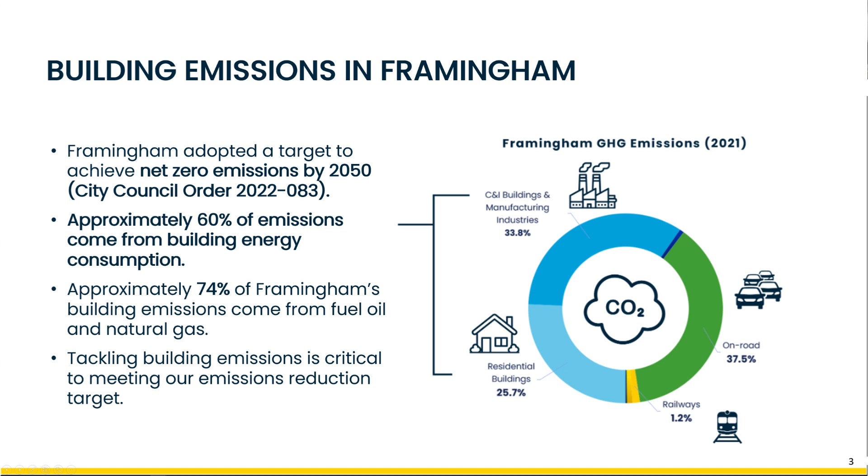So while we have to tackle that challenge, I think some important context is that building energy code can help ensure that we're moving in the right direction with our new construction, building towards a net zero future. Improvements in this area not only make our buildings more efficient and less costly to operate, but also healthier, with improved indoor air quality and enhanced resilience.

So tonight we'll be focusing on the Specialized Opt-in Energy Code, a new energy code option developed in 2022 as a result of the Massachusetts Decarbonization Roadmap Act. It's being explored for adoption in Framingham.

The Specialized Code builds upon the Stretch Energy Code, which was adopted in Framingham in 2014. The Specialized Code prioritizes deep energy efficiency, reduced heating loads, and efficient electrification for new construction. Since its development in 2022, it's been adopted by communities such as Natick, Ashland, Sherborn, Wayland, and Worcester. Dylan's going to go into some more detail about that as well.

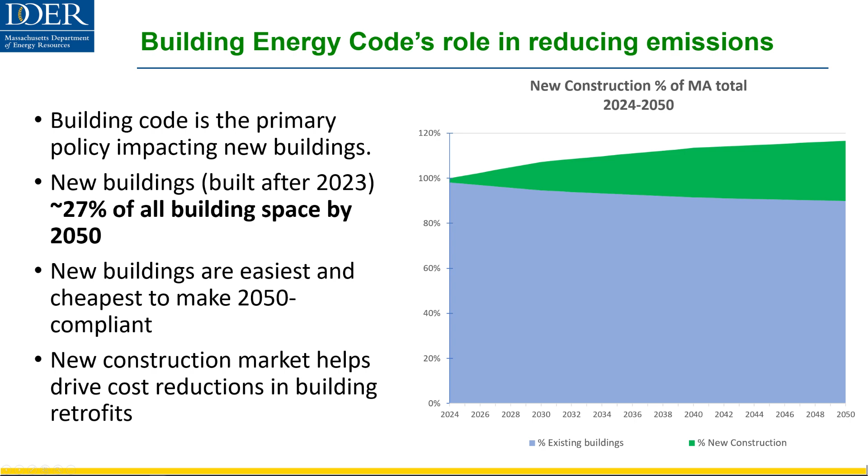With the specialized energy code and also the stretch energy code, we're really leveraging what's going on with the grid. Right now, the electricity sector within the state is fairly gas dominated, which means we have a fairly high emissions factor in this state. That means when you're heating by electricity, especially with most currently heating technology like electric resistance baseboards, it's actually very greenhouse gas intensive, even more so than heating directly with fossil fuel equipment.

However, especially in the past 5 years, past decade, there's been enormous growth and improvement in the models of heat pumps coming out, not just air source heat pumps but also ground source heat pumps. As you're all aware, with network geothermal that's going to be a lot more prominent in the coming decades. Despite the fact we have a pretty emissions-heavy grid right now, these heat pumps are able to heat and cool buildings with such great efficiency that right now they are less emissions intensive than just heating with gas.

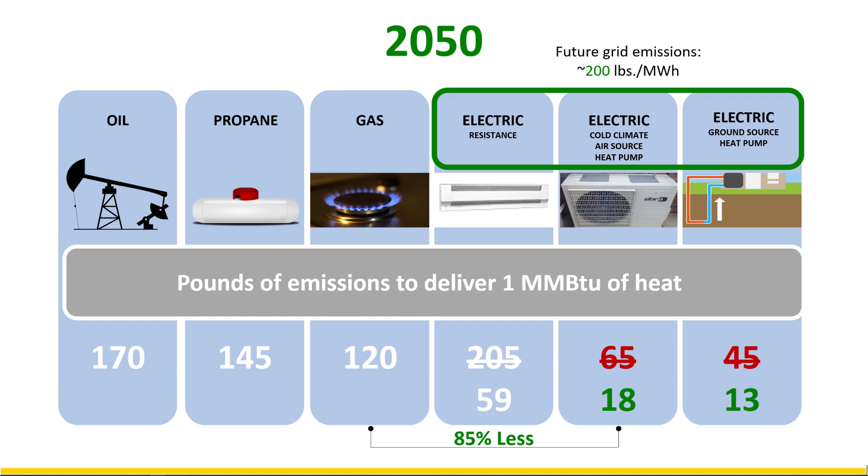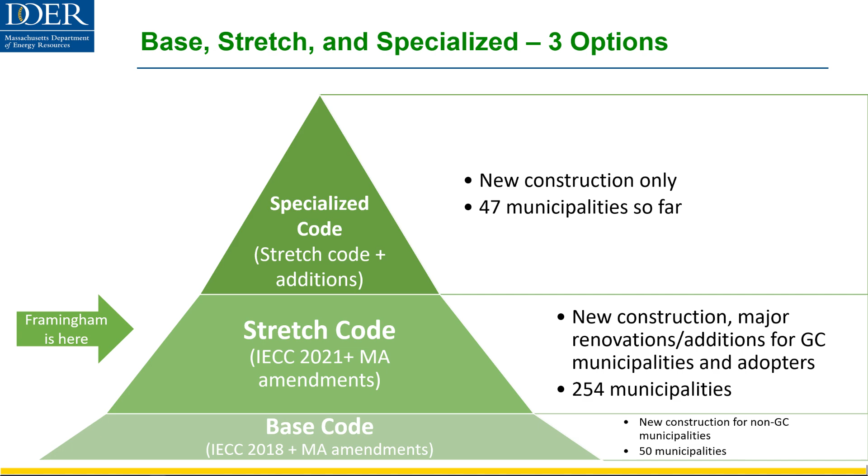So Sean kind of introduced this idea earlier, and I just want to contextualize what the specialized code is in relation to the other codes before Michael goes into a deeper dive. As you all know, Framingham has been a stretch code community for many years. It's one of 254 municipalities across the state, the vast majority of which are green communities. The specialized code exists at the top of this code pyramid, essentially as the stretch code plus an appendix plus some additions. So far we've had 47 adoptees to the code and counting. This code has only been available for adoption since January 2023, so in about 20 months we've already had 47 municipalities adopt the specialized code.

To provide a bit more detail on the policy, the specialized stretch code is one of the criteria of a new grant program that DOER and the Green Communities Division is launching. It's called Climate Leaders. This program will provide substantial grant funding for municipal renewable energy, outreach, as well as greater electrification and decarbonization technologies for municipal buildings. The specialized stretch code adoption is one of those criteria, and Framingham is on its way to meeting several others as well. Framingham is also well positioned to take advantage of the Climate Leaders Grant Program, considering it has already received more than $1.2 million in Green Communities funding, both in designated funding and competitive grants.

As Sean was alluding to earlier, a lot of Framingham's neighbors have also adopted the specialized stretch code. This includes Sherborn, Wayland, Natick. The town of Sudbury is considering it sometime next year. But as you'll see from the map, there is now a much greater geographic dispersal of the adoption of the specialized stretch code, both in Western Mass and the Cape and Islands. We're seeing municipalities of different urban densities and income levels also adopt the specialized stretch code. So this isn't really restricted to the Boston metro area—it's spreading far and wide across the state.

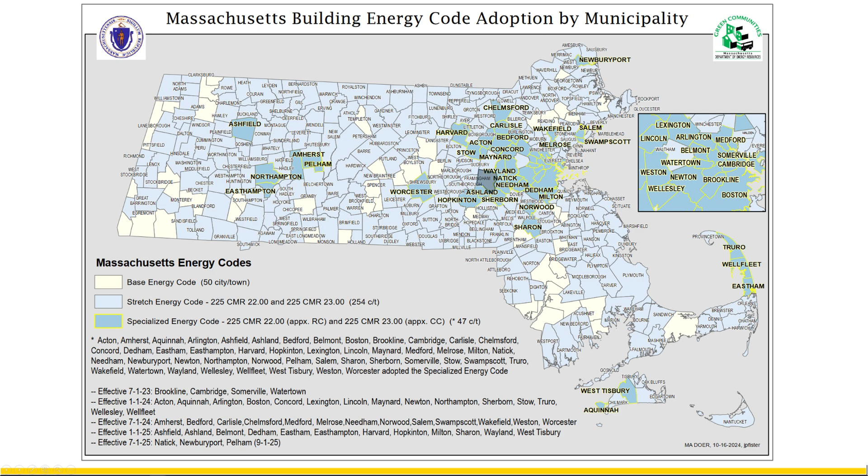So I'm going to turn it over to Michael Rossi for a bit of a deeper dive on the specialized energy code.

It's just the button, and you just got to press it hard. Great. Yeah, thanks so much, Dylan.

So my name is Michael Rossi. I'm an energy code specialist at Performance Systems Development, or PSD. We provide energy code training and technical support to code officials and others across Massachusetts on provisions of both the stretch code and the municipal opt-in specialized code. Before I start, I want to say I'll be referring to the code in a few different ways throughout the night—you might hear me call it the opt-in code or the specialized code, but these terms are interchangeable, both meaning the same thing. Essentially, it's a second level above the stretch code.

First I want to bring forth some fast facts about the code. Essentially, it only applies to new construction—there's no impact on the specialized code for existing buildings, so only new buildings will be impacted by the code requirements. There are also no additional requirements under the specialized code if you're building a new all-electric home; those are the same requirements as under the stretch code. So there's nothing new you'd have to do in that case.

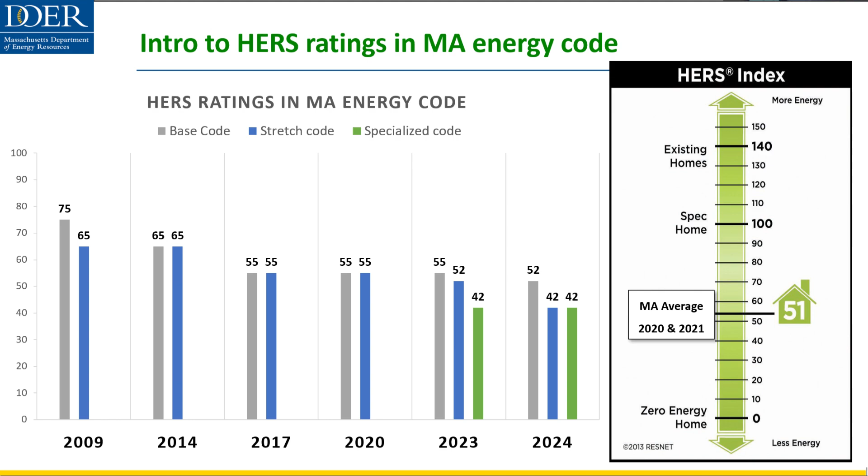The requirements for the HERS rating are equivalent to those found in the stretch code, so there aren't any differences to the HERS score between the stretch code and the specialized code. Now we're going to break down some of the specifics about what's different between the different code versions and talk about some of the specific provisions.

If it's an all-electric new home of any building of any size, the requirements are the same as they would be under the stretch code. It has to be either a HERS 45 or Passive House certification. There are two aspects of certification: the US model, called PHIUS, and the European model, PHI, or Passive House Institute. Essentially it's similar to HERS—also a third-party certification system—but I'll let the experts talk about that later on.

When you're building a new mixed fuel building under 4,000 square feet, the HERS requirement under the stretch code is a 42. But for the specialized code, there are two additional requirements: inclusion of a solar photovoltaic system with a minimum 4 kilowatt array, and wiring for future electrification. That means any equipment currently using fossil fuels for space heating, water heating, cooking, and clothes drying has to have an outlet nearby for future use of electric equipment if you replace it.

If you build a new home over 4,000 square feet—typically larger luxury homes—the mixed fuel pathway isn't actually available. The requirement is the zero energy pathway under the specialized code, which requires enough solar PV to get to a HERS 0 or PHIUS 0 certification, as well as that wiring requirement for electrification. Essentially it has to be a score prior to factoring in on-site power and then a score after factoring in on-site power—we'll talk more about what gets you there in a moment. It's really project specific; the size you'll need to get to zero really depends on the home you're building.

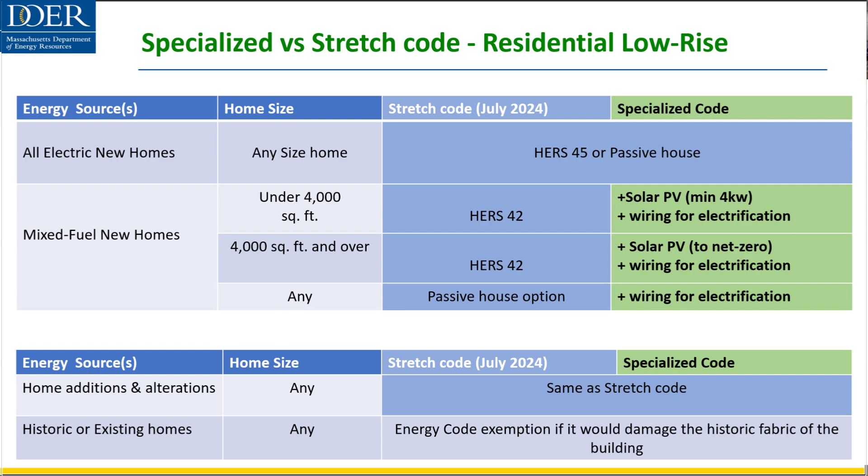So those are the main differences on the residential side. Here's a little bit more about the solar PV requirements. The mixed fuel pathway is required to have solar of about 300 square feet in size, oriented correctly—between 110 and 270 degrees of true north, where the system will be most effective. That's the outline of what the orientation of the home has to be in order to require solar.

Additionally, the code does not require trees to be cut down just to meet these requirements. The code describes it as shaded more than 70% of daylight hours annually. So if it's demonstrated that the site is shaded ahead of time, the solar requirements are not applicable.

As noted, if you're building a new all-electric home, solar is not required. If you're building passive house, solar is not required. If you're building a mixed fuel home under 4,000 square feet, you have to have at least a 4 kilowatt array. If it's over 4,000 square feet, those larger homes, you have to have enough to get to net zero, which is project dependent, but might look like 8 kilowatts or higher. For other residential buildings like 3-story low-rise multifamily buildings, the requirement is 0.75 watts per square foot, identical to the requirements found in the commercial portion of the code.

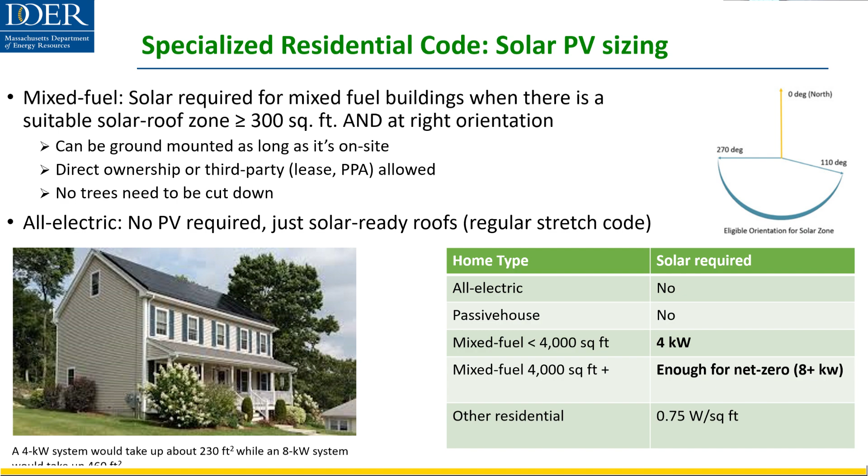There are a lot of really great incentives out there available to help meet some of the requirements here, to make some of the upgrades you're going to have to make to meet this code more feasible.

Mass Save incentives are subject to change, and they are in the process of developing a new 3-year plan, so we'll see what the incentives look like moving forward.

As of now, for single-family incentives, there's up to $15,000 for HERS if you achieve a HERS 45 or below, which is the same as what would be required under the code. For passive house, there's a $25,000 incentive. And there are adders for certain technology upgrades as well.

If you're using an induction stove for cooking or a heat pump water heater for water heating, there are potential adders to the amount of incentives available as part of this new structure. And those are just some of the incentives in Mass.

There are also some really great federal incentives available through the 45L tax credit, such as $2,500 if the home's built to Energy Star, as well as $5,000 if it's a DOE zero net energy ready home and meets that program's requirements. Additionally, there are some incentives available for solar as well, including a 30% federal tax credit extended through 2032.

As well as a 15% state level tax credit that's capped at $1,000. There are also some incentives available through both net metering and SMART programs.

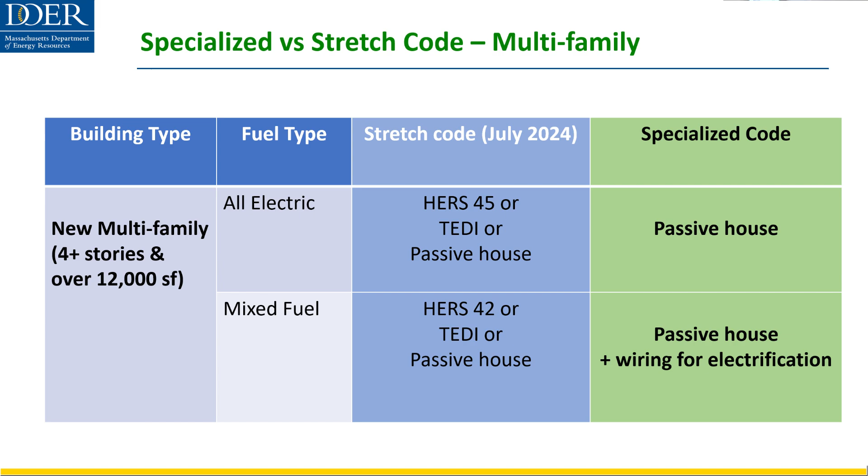My last slide before I turn it over to Hank is just similar information to what I just said, described in a different way. For all electric buildings, the requirement and pathway available under the code is passive house. For mixed fuel buildings, it's passive house plus that electrification ready requirement we just talked about. What passive house means, I'm sure Hank will get to in just a moment. So thank you all.

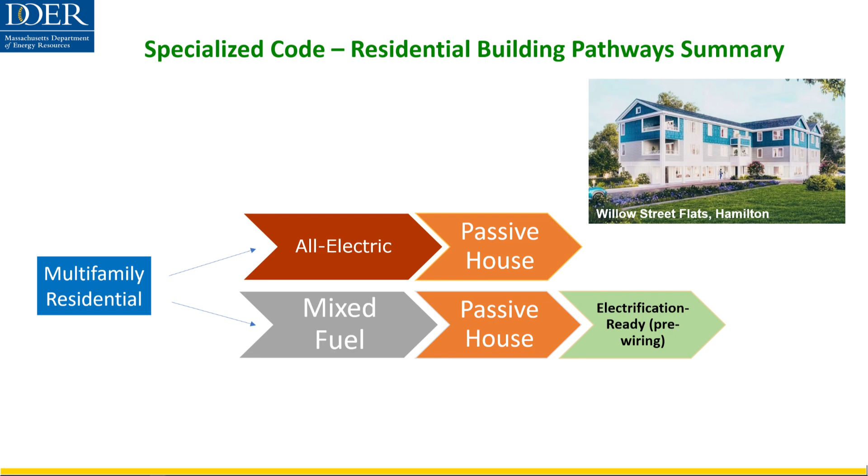I'm the president of Passive House Massachusetts. I've been in this role for close to 10 years after I retired as an affordable housing developer, and I've devoted those 10 years to advocacy for Passive House in codes and incentives and developing training programs. I'm going to go through my slides quickly and be available to answer questions. Stretch code is what you're working with now.

So what is a passive house? Passive House is a third-party building verification program with two options for certification: the Passive House Institute US, and PHI, the Passive House Institute International, which is European-based. The certification standards set energy performance and building envelope airtightness requirements, minimums that have to be met through a computer modeling program.

So how do passive house buildings perform? When you meet the metrics of these two systems, heating loads can be reduced by up to 90% or more compared to a typical code building, and overall energy demand can be reduced by 60% or more. These are remarkably energy efficient buildings. It's a quantum leap over code.

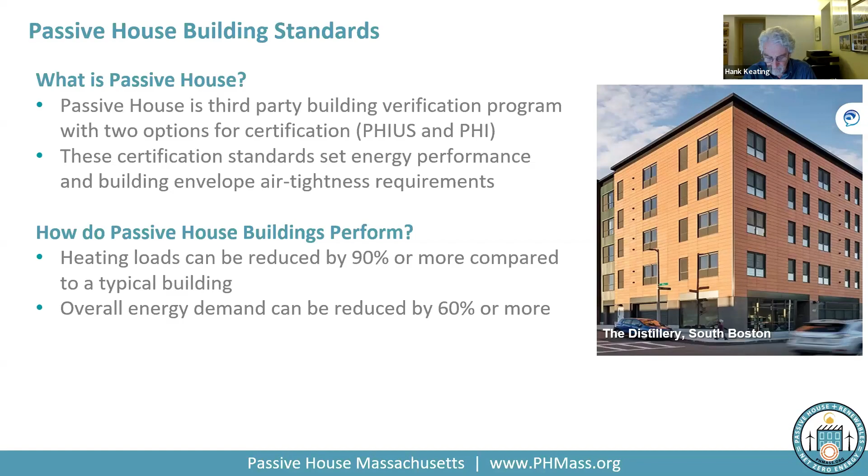Any type of building can meet the passive house building standards. I raise this because the term 'house' is in the name, so most people think it's only for housing. It's not—that's just where we've seen the major pickup of the technology in this state. But you can see here a school in Beverly, a single family home in Cambridge, and this is the largest passive house office building in the world, which recently achieved certification in downtown Boston. So it's any type of building.

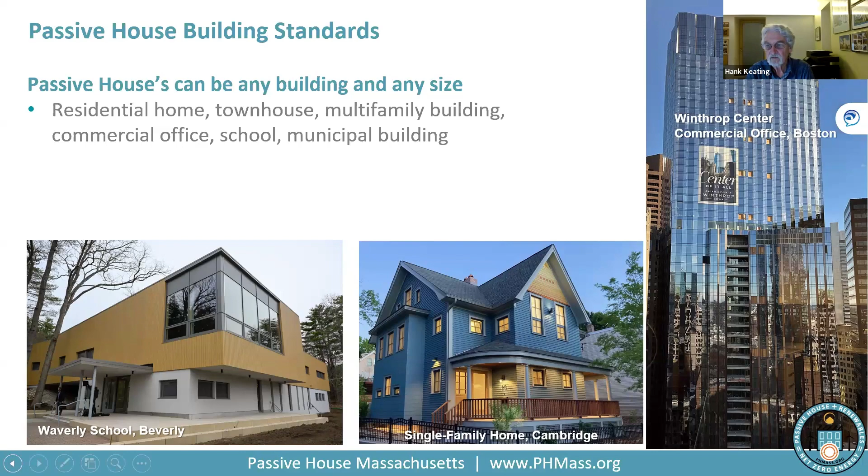I'm not going to go through this in great detail, but the features of passive house buildings are building science based. It starts with the building envelope, and the requirements are continuous thermal insulation, an airtight building envelope, thermal bridge mitigation, high performance windows and doors that reduce radiant cooling for resident comfort, and optimized solar heat gain, which is important for smaller buildings like single family homes. It's surprising how little significance that has on large multifamily buildings.

Mechanical systems typically have balanced and continuous ventilation with heat recovery, and the reduced load on the building allows for efficient and minimized heating and cooling systems. We like to say that if we put the money into cheap products like insulation, we can reduce the amount of money we have to put into the systems by downsizing them. And then there's efficient water heating and distribution.

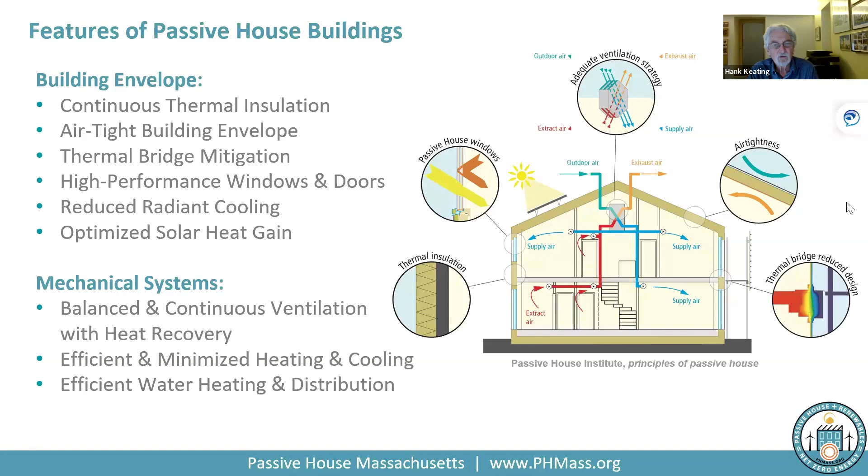Passive house buildings have many benefits from the building envelope. The financial benefits are predictable, stable, and reduced energy costs. We determine through modeling that the building meets that standard, and it's going to have dramatically reduced energy costs. That results in smaller and more efficient equipment, and in the end you've produced a higher quality, more valuable asset—a building with better durability in its envelope, one that's not going to require retrofitting 10 years from now as the state codes tighten up further.

Health and comfort benefits are sometimes overlooked, but it's obvious: we have improved indoor air quality with 24/7 balanced ventilation to all the spaces in the unit, reduced air drafts and consistent temperatures, and quieter acoustics—they're remarkably quiet buildings. Also important is the ability to shelter in place during a power outage, much extended. The environmental benefits include reduced carbon emissions, climate resilient buildings that won't require retrofits, and Passive House is the perfect platform for full electrification and net zero buildings. If you're going to aim for electrification and net zero, you should start with the most energy efficient shell you can, and that's Passive House.

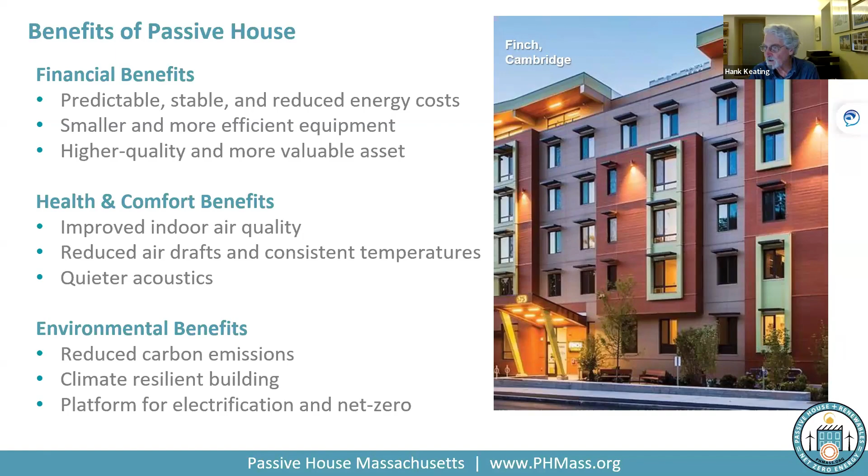So how do you design a Passive House? The architects and engineers must work with a certified Passive House consultant to design the low energy project. During that initial process, the consultant helps the team develop the approach to the building, and the early designs are submitted to the certifying agency, whether it's PHI or PHIUS, and go through early review to make sure they're on track for certification.

Then contractors are supported by Passive House raters and verifiers who inspect, test, and verify during field construction. So overall, the building owner follows a two-step certification process—one before construction, with all the submissions to the certifying agencies, and then after construction, showing the modeling and design submissions and all the inspection reports. QA/QC is an incredibly important aspect of Passive House to make sure we get these buildings built properly.

Even before this opt-in specialized code was adopted by 47 communities, which just happened this year, the existing incentive programs through MassSave had produced a registration list of over 15,000 multifamily housing units across the state. You can look at this slide and see that back in 2021, we had under 100 units of Passive House in Massachusetts. This is projecting construction completion of the units that have opted into the MassSave program.

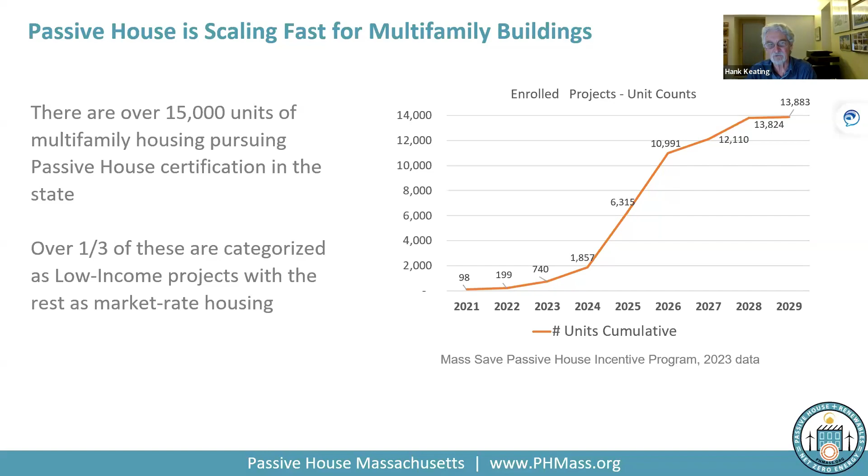Before that program was even designed, before the specifics of the incentive program existed, Passive House Massachusetts got together with the Mass Clean Energy Center and worked on the Passive House Design Challenge, because the biggest question was what does it cost to do multifamily Passive House. The challenge was to demonstrate you could do it for under 4%.

These are the six projects that competed and were granted money to take on the challenge, and you can see it was a major success. Most of them are under 2%. We have one at 3.5 and one at 4.1 that didn't quite make it. The important thing to focus on is that these buildings were designed seven years ago and built five years ago. The education of the design and construction community in the intervening years has been tremendous, and we can essentially guarantee that these projects, with the right building team and the right training, can do multifamily projects for less than 3%.

Next slide, please. And we'll go to, yeah.

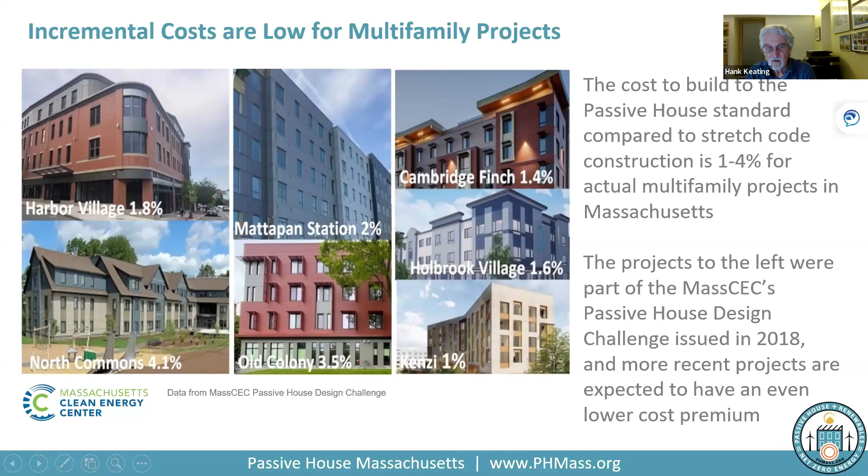So I often hear people say, isn't this going to be very hard and expensive for affordable housing? The fact is affordable housing has been leading the way, because DHCD—which is now EOHLC, a very awkward acronym—gives extra consideration to Passive House projects through their funding program, the qualified allocation plan. They award bonus points. All low-income housing tax credit funding is so competitive that it's almost compulsory for a project to go after those bonus points. We're at a point where over half of them in every funding round propose that, and the other half have other built-in priorities they can use instead of Passive House. So if you don't have a specific way to get funded, you need to go after Passive House for a low-income housing project.

So this is the multifamily project incentive program. Michael went through this, but I'll go through it in more detail because I think they did a great job designing it. A project team can get $5,000 up front for registering—so when we say we have 15,000 registered, that's not necessarily the number that will follow through. They get $5,000 for a feasibility study, and at that point they can decide whether to move on. The next step is energy modeling, for which they can get up to $20,000 maximum. If that energy modeling shows they can achieve pre-certification, they get another $500 per unit. Then, upon final certification after completion of construction, they get the final $2,500. So there's well over $3,000 worth of incentive available per unit for multifamily housing.

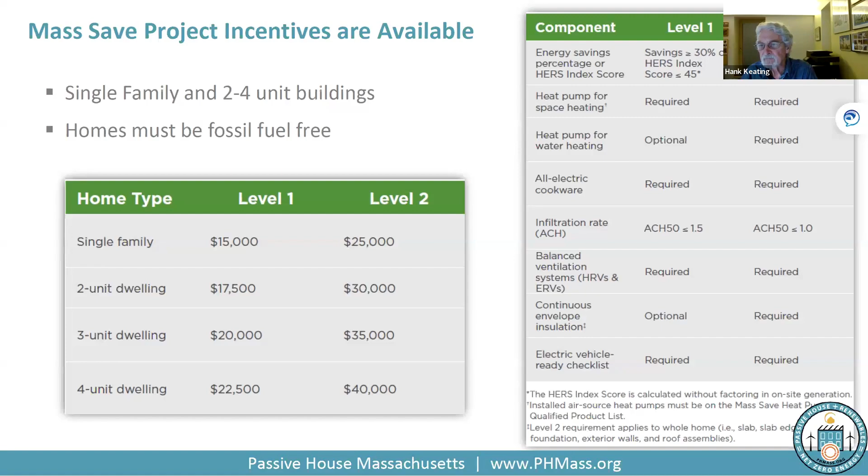So with all of the projects moving forward with passive house, it's critical that we have passive house training. Mass Save, when they put in the passive house incentive program, contracted with Passive House Mass to do passive house trainings. We've done thousands of hours of training over the last 5 years, including no-cost lunch and learns, workshops, and 50% reimbursement available for professional certification.

If somebody wants to become a certified passive house consultant, they can take the course and get a 50% reimbursement through the program. There are many other agencies and organizations providing training, including Studio for Performance Design and Construction. Nick is here and he'll be speaking after me. Beyond that, we've got NESEA, BE+, BSA, the Northeast HERS Alliance, and the Builders and Remodelers Association, all helping to take part in the training needed.

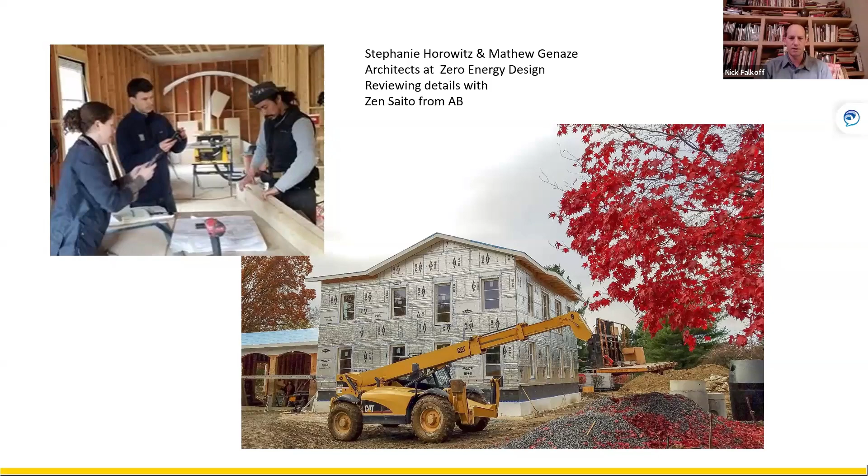So that house we showed earlier is the finished house in Newton. That's actually a net zero house with transportation, meaning the building generates enough electricity to power both the house and their electric vehicles. So that house will never have a gas bill, an electric bill, and they probably won't have to pay for any fuel for their vehicles.

So when builders talk about costs, I encourage people to think: yes, it costs the builder more upfront, but the savings passed on to that homeowner over 10, 20, or 30 years, with no utility bill and no transportation bill, can really add up. I think we have to redefine how we talk about cost in terms of upfront investment versus cost to the consumer. Next slide, please.

We found out about high performance building through the Builders and Remodelers Association of Boston, where I've been a member for about 20 years and got my license. A former president of that organization recommended I join a Builder 20 club, saying it was the best thing he ever did for his company. Through that, I reached out to NAHB and joined a Builder 20 club, a peer review group that partners you with builders from around the country to visit each other and learn. I was visiting with a builder, and one of the other builders was building Passive House in Iowa.

And I thought, this is kind of cool, I'd like to get into this. And I was emailing with the project manager, and we said, let's look into this. So we reached out to the PHIUS trainers course, and one of our PMs went down and took the course. So our introduction really was through the Builder Association, through some other builders practicing this in the Midwest.

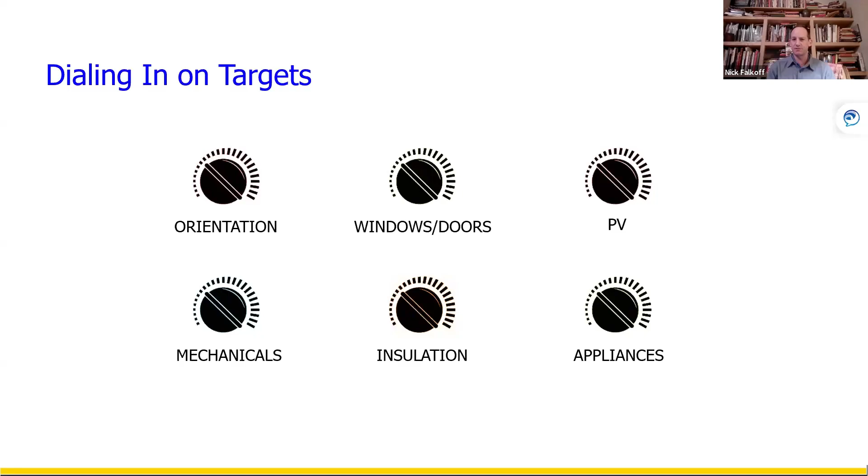If we go to the next slide, this is an example of one of the assemblies. This is a passive house we built where, once the design is getting ready to go to permitting, you want to know what your dials are. Now, this is a passive house, not a HERS 42 model. It's just a case study of what you can get into.

Every job is different. You might have really good southern orientation, or a lot of glazing facing the wrong way because you're trying to get a certain view, and so you might have to dial up another assembly to meet your HERS number. This house has very thick walls, an R44 wall. It has a thick roof, an R60 roof, and high performance triple glazed windows. Every assembly, every house, is going to be different.

What I tell people now is to really contact that HERS rater very early in your design. As soon as you can get your HERS rater on your team, do that. If your architect doesn't have a good HERS rater, reach out to any HERS rater and they'll connect you with one. Take the next slide, please.

On this house, that assembly I showed you, we're doing a 2x6 wall, and we use a lot of reclaimed foam on our jobs. So it's 2 layers of reclaimed foam with a layer of zip on the outside. When we're dialing in high performance, we're always looking at what is the cost, what is the performance, and then what is the embodied carbon. That's how we look at it.

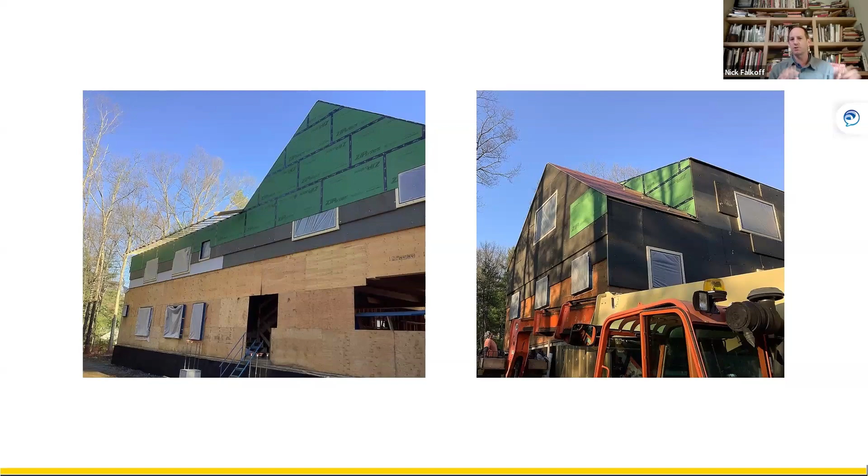So every builder is going to have to find that sweet spot between cost and performance. But that's where you really got to get that HERS rater on board early to know which way you're turning those dials. Next slide, please.

That's a passive house we built out in Weston. That's kind of what it looks like after that foam is added on. We're trying to find assemblies that are really familiar to what carpenters already do, and then just adding layers that they can understand—it doesn't have to get super complicated with how you achieve this.

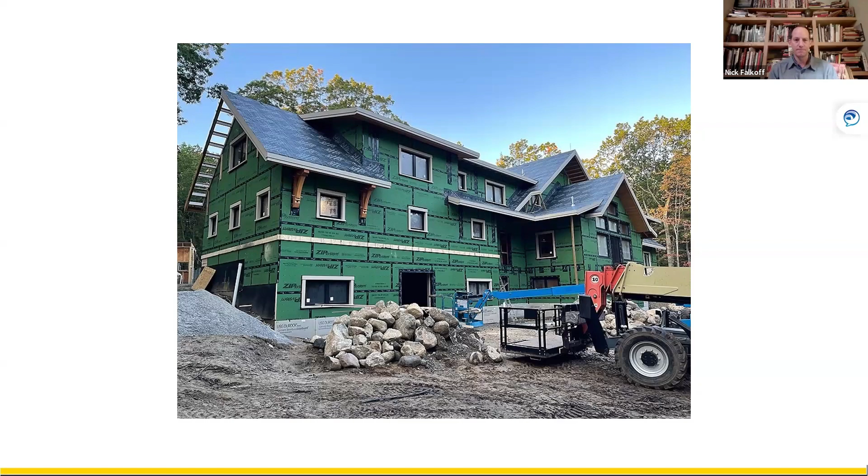Keep your value engineering options open, so don't design your team into a corner, right? If you don't think about orientation and then you start trying to dial up, you might have to go to a really thick roof or a really high performance window because you didn't get your orientation or your glazing right.

Then focus on high efficiency cooling systems. If you're not familiar with those systems, they're becoming more and more common—more and more HVAC contractors know how to use these heat pump systems. If you look at your orientation, your windows and your mechanicals early, those are going to have the biggest impact on your HERS score. Then if you get those things right, you can play with your assemblies and figure out which assembly works best for your trade contractors.

Once you figure out your formula, what Bob Riley shows with the Habitat is once they get their formula, they repeat it and just crank that out. At Auburn Hills, we've got a few formulas now our crews like. You have to find that assembly that your crew likes, and then you can repeat it. Like Hank showed in the multifamily, your first time through might cost you a little more, and then as you work through it, you get more efficient.

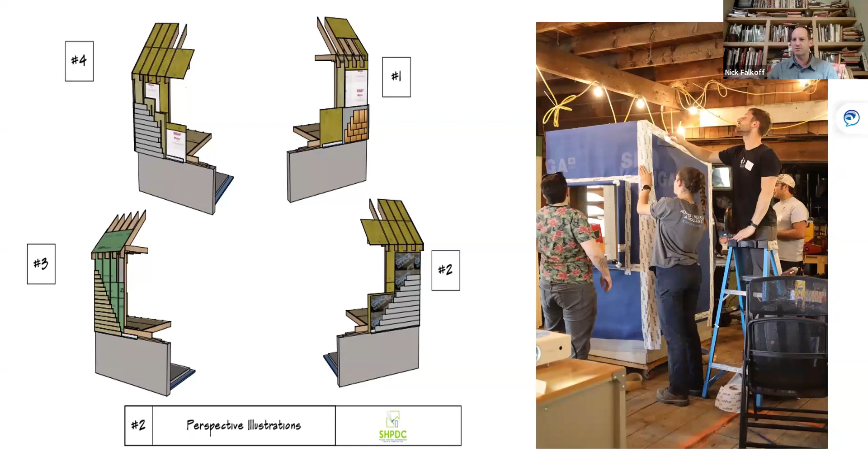Hopefully we'll be creating more hands-on courses and training facilitators through the Builders Association and other vocational school instructors to run these classes around the state. That's our goal. I think that's it for my slide, Sean.

Just a summary, same thing Hank said — what are the benefits? It's lower operating costs for the homeowners and renters. A net zero all-electric house means they have no gas or electric bill for the life of the building. A net positive building makes more electricity than it uses, and that can power your vehicles. Better indoor air quality, better thermal comfort, and better resale value on the marketplace. This is a better asset, and it's increasingly becoming valued on the marketplace as consumers become more aware of these units.

So when people talk about cost, yes, it can cost more to build it, but you can sell it for more, and it can hold its value longer.

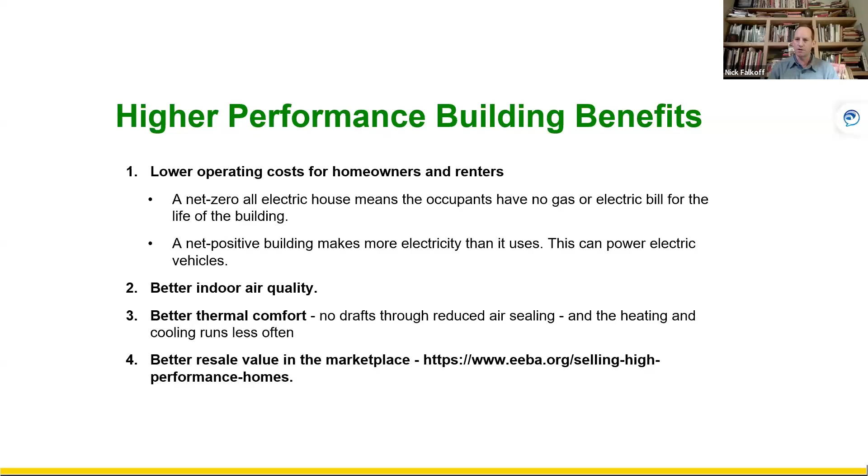So I think when I hear people saying it's going to cost more, yes, but let's broaden the discussion to 10 years out, 20 years out — what is that going to look like? That's all I've got for my slides.

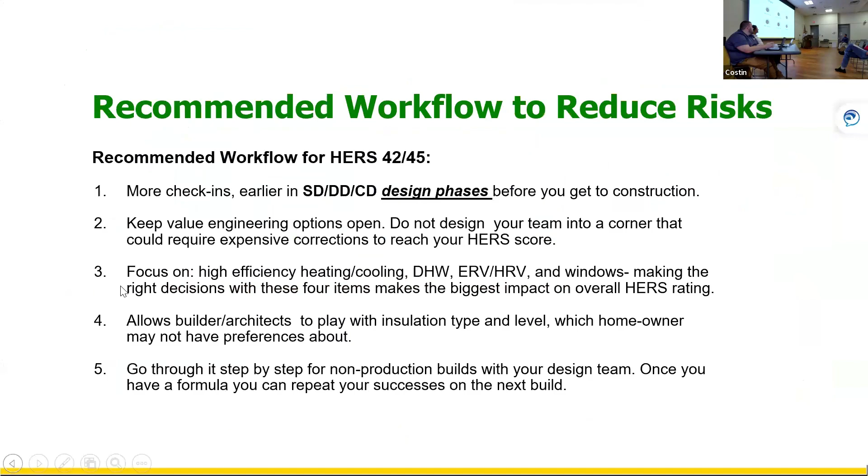I'm going to jump back to an earlier slide. When we were going through the slides, I think people on Zoom may not have seen this one, since there were a lot of slides we went through tonight.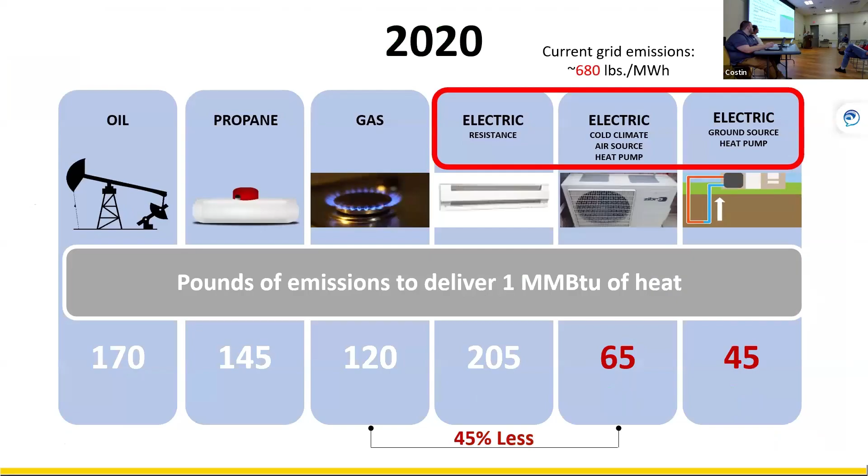Let's see here. I think this is a good summary of the specialized code. This was one slide that wasn't picked up in the Zoom recording, so just to highlight some of the key elements. I think that's important. I see we also got a question here.

So while that's up, we got a question online: are the passive house incentives only for new construction, or do they apply to renovations of existing buildings as well? Anybody want to take that on the team?

Yeah, essentially they're for new construction. I've run into some projects where they're mixed—some of it's rehab, some of it's new. Under the Mass Save incentives, I've seen them be flexible and able to wrap in the rehab portion of the building, but generally speaking, they are for new construction.

Sometimes, depending on the level of renovation, Mass Save might consider it new construction, which has different thresholds than the stretch code. But if it's substantial work to the building, Mass Save might treat it as new construction.

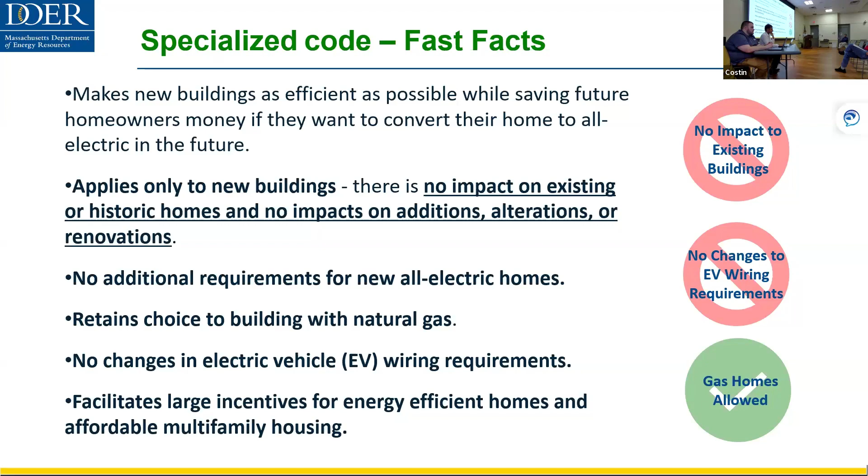I think one question that I hear about too, obviously there's no additional EV wiring requirements. I was wondering, just to put that on the table, what are the requirements under the stretch code now? Does anyone want to comment on this?

Yeah, so the requirements under the stretch code, I believe, are found in... I have to check the specific section. For residential buildings, the EV charging requirements are found in section R404.4. One and two family dwellings and townhouses have to have at least one 40 amp branch circuit per dwelling unit to provide AC level 2 charging.

And all other R-2 buildings have to have at least 20% of spaces served with a 40 amp, 208/240 volt circuit with a minimum capacity of 9.6 kVA. So those are the residential requirements for both one and two family dwellings and townhouses and all other R-2 buildings. There are a few exceptions as well—I can speak to those too if anyone has questions.

Great, thank you. We also got a question about slides—yes, we will be posting the slides after this meeting on the specialized code page. I'm going to navigate back and show you; that was on the next slide.

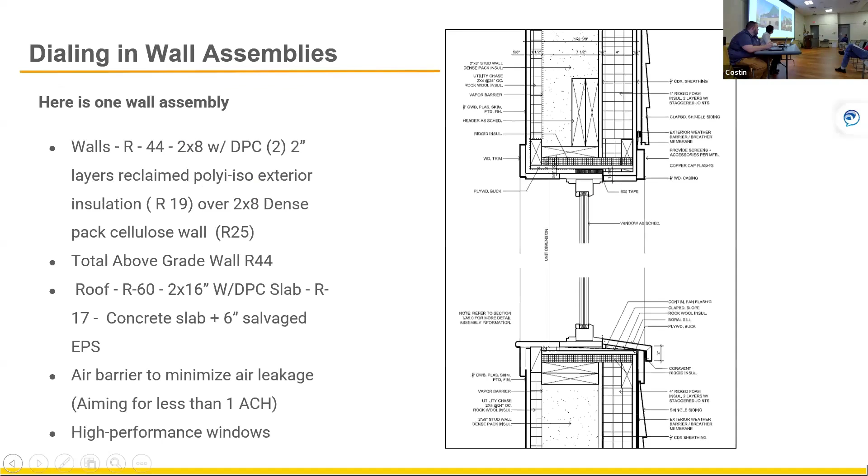I also see a question from Nick in the chat to Fred about questions and concerns from builders. Well, this has not been implemented as far as the opt-in code goes, so I have not experienced any feedback yet for that. That remains to be seen. I don't like to forecast what might happen—I'll leave that for when it actually happens. But no, I have not been approached by anyone on this for the future, or when it might be implemented.

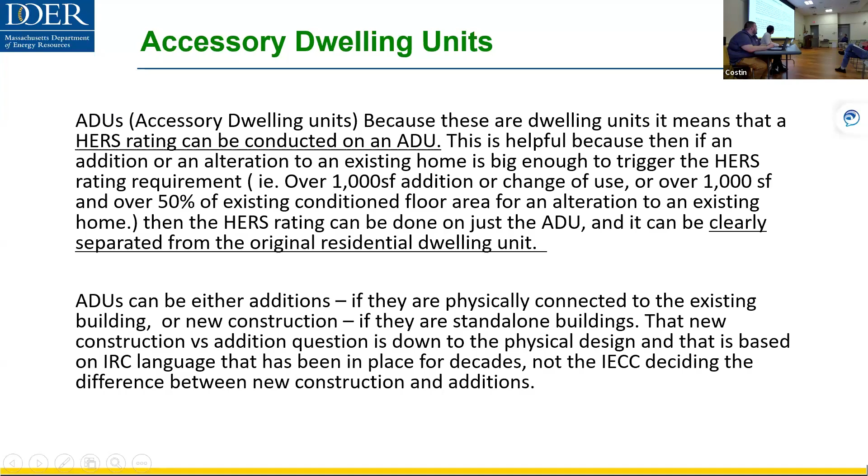We had some supplemental slides, mostly on the commercial side and on ADUs. It's just miscellaneous information, but it's really pertinent if anyone has any questions on that—it's a mishmash of stuff.